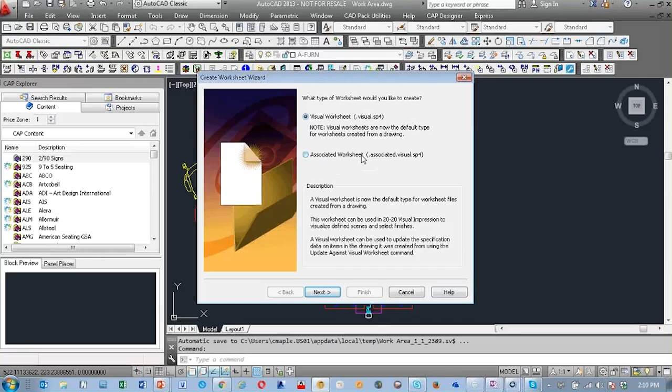There's two types of worksheets that you can create. There's a visual worksheet, which is basically your standard takeoff, and then there's an associated worksheet, which links the worksheet to your drawing. It doesn't really matter which one of those you use. Everything that I'm going to show you today will work either way. So I'm just going to go ahead and select the objects in my drawing and create a worksheet and have that worksheet come up for us.

Okay, so here's kind of the standard way. I've created my drawing. I now have created my worksheet, and you can see that all the items are in here, but they don't have finishes on them. There are multiple ways that you can apply finishes in Worksheet. For today's class, I'm going to just go into global options and globally select some options so that we can quickly get the finishes specified. So I'm going to pick a bright white bracket here.

I'm going to pick a standard textile. I know from my drawing there are ways that you can organize and group this. I know from working with this drawing what I'm actually specifying here. So this is a textile option on a chair, and I'm going to select the commuter cloth, and this is going to be slicker. I'm going to select a storm strap on my chair. The frame is going to be silver.

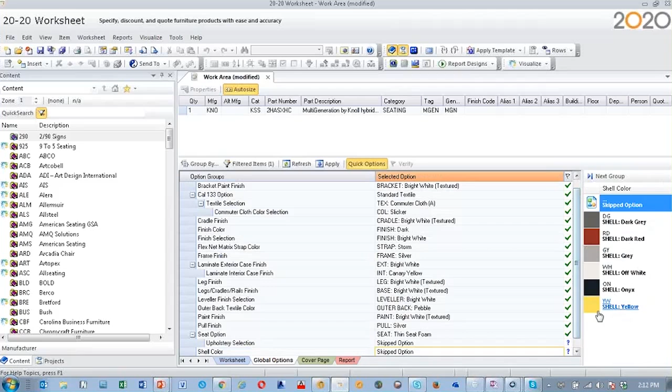The laminate exterior on my case is a bright white. The interior on my case is going to be yellow. Oh, by the way, this is Knoll product that I'm specifying here. I've got bright white legs. My outer back is going to be pebble. The paint finish is going to be, I believe this is a bright white as well. Pull finish is silver. My seat option, I'm going to go with a thin seat foam. Oops. With a dark gray shell.

Go back here, I skipped this option here. Standard textile, sorry. The seat textile here I want to pick is a bistro chamomile. And then my textile is going to be commuter cloth again, and again that slicker color, and then I'm going to pick my veneer, and I'm going to pick a maple veneer, and matching veneer edge.

Okay, so I've gone through and I've selected all of my finishes. So now if I click back on my worksheet, I can apply those finishes, and you can see that everything now has been selected. So just to review, I've gone from my drawing into my worksheet, applied all my options. Now I'm ready to do presentation drawings or rendering, so I load Visual Impression at that point. So I'm going to go into scenes. I don't have my drawing broken up into scenes, so I'm going to choose the entire drawing, and it's going to load Visual Impression.

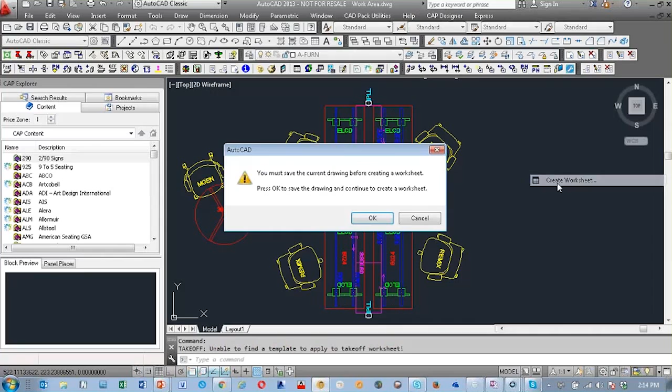So I'm going to repeat myself here a bit. I'm going to go back to CAP. I'm going to create a worksheet file. I'm going to overwrite the one we had before.

And I'm going to go ahead and let it create a file.

At this point, I don't have any options applied, but I can go into Visualize, go to Scenes, Entire Design, and have it load visual impression from there. What you'll see load is that same scene, but with no options applied, which is basically the way it is right now in Worksheet. So none of the options in this scene have been applied.

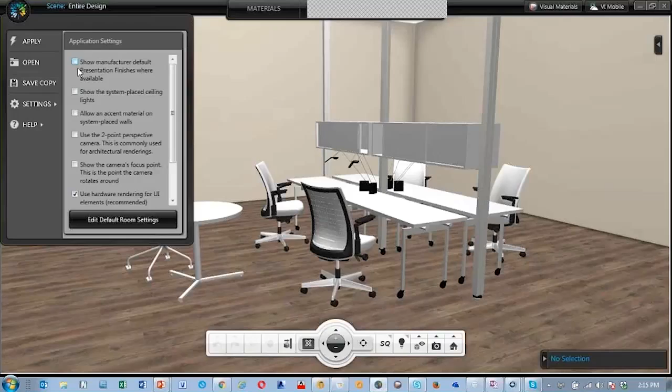Just as a note, some manufacturers, like Knoll for example, show default presentation finishes where they're available. This means the manufacturer selects finishes to show visually before they're selected. If I turn this on, you can see those finishes are very different. I downloaded this from Knoll's website and they've already got their presentation finishes in there. But for this, and for most manufacturers, the presentation finishes may or may not be there.

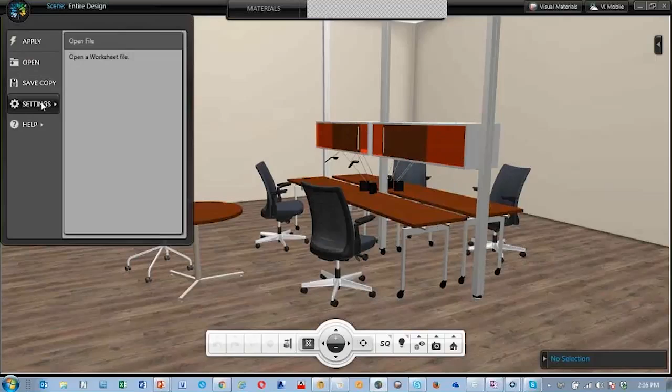So I'm going to turn that off for now.

Okay, so let's now look at using visual impression as a visual specifier. I'm going to go ahead and select this chair, select materials, and just like it's presented to me in Worksheet in a text value, it's presented to me in visual impression, but it's more visual.

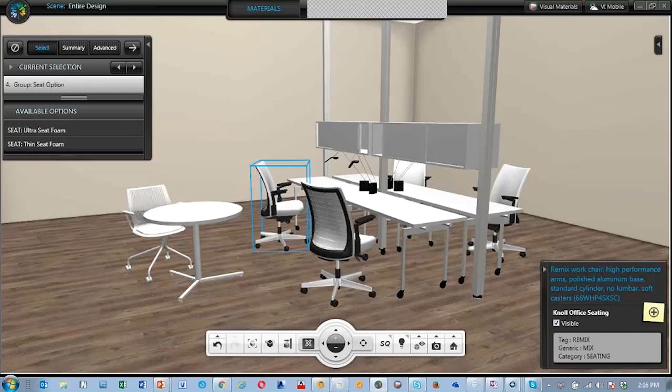So with the strap on the back of this chair, I want it to be storm. The outer back, I want to be pebble. And you can begin to see those options being applied to the chair as you select them.

I'm going to select a thin seat foam, standard textile. Then I can scroll through here and select the textile that I want to use, which is, oops, I passed it, I think, which is Bistro. I'm going to pick the chamomile.

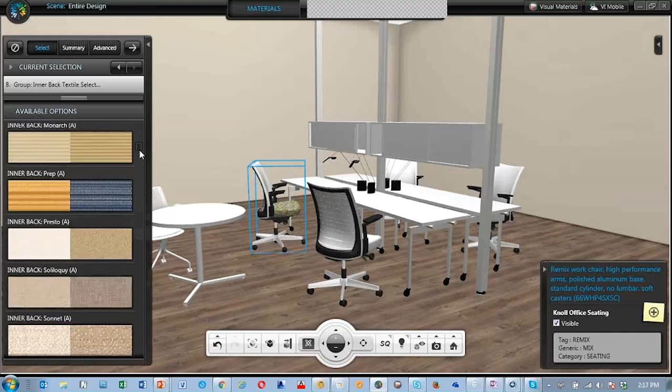Then for the back, I'm going to go through here and select commuter cloth again. These are the same selections that I made when we did it in Worksheet, so I'm going to select that again. The difference is, as I navigate the scene, I'm applying things as I select them.

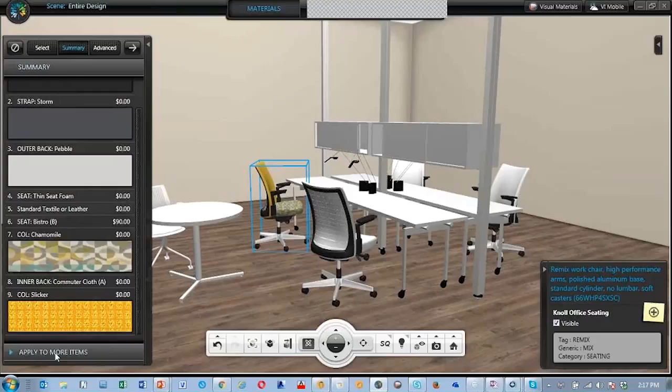So it's very easy for me to see how my selections are going to look on the appropriate item. The other thing I can do is there's a tag here that says apply to more items. In this case, I'm going to apply it to all occurrences of the item because I have 4 different chairs. So I'll select that and apply, and you can see now all 4 of my chairs have been applied.

Let's go on and do the same thing on the table here. I'm going to select bright white for that finish. The leveler is also bright white.

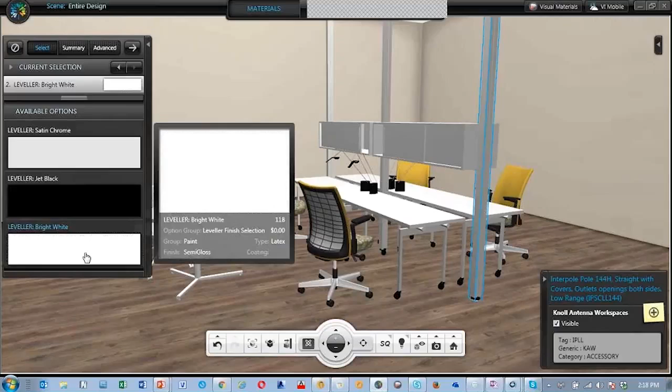Then I'm going to apply this one to all occurrences of that item, or because personally I don't know if this middle pole is the same part number as the others, I will select any items accepting all the options, because they're like items, those should apply.

One thing I want to note here is this does vary by manufacturer, just the way the different manufacturers set up their data. Some you can apply in a broad brush manner, others you have to be a little more selective, but we give you 3 different choices here to apply items.

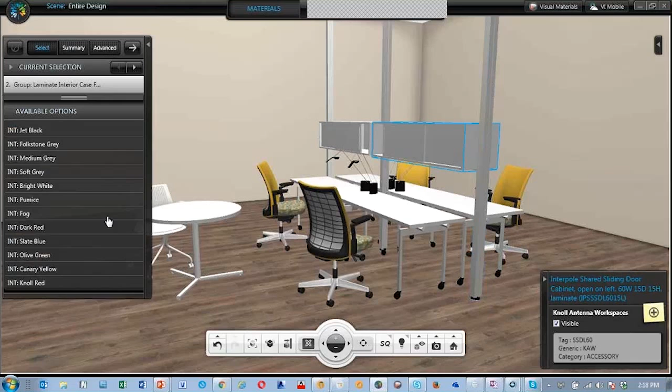So now I'm going to select the overhead bin. That's bright white, and then I want the background in there to be canary yellow. And then I'm going to, because I know, pick the brackets.

I'm going to pick a silver bracket. And because I know that these happen to be 2 different sizes, I'm going to say items accepting all the options above because they're not the exact same part number. So I'll apply that, and that will appear there.

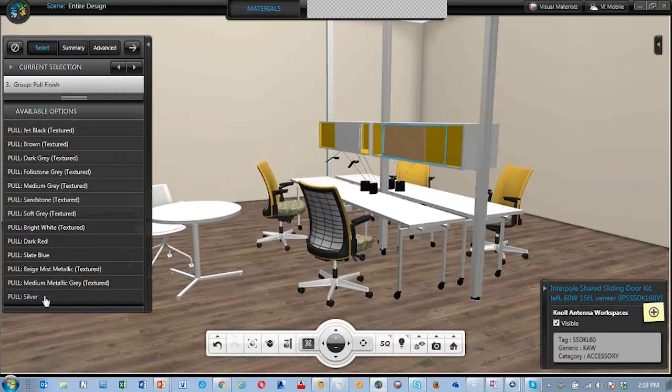Select the door. I'm going to again pick that maple finish for the door, and I'm going to pick a silver pull, and apply that to all the finishes too. As you can see, that gets applied all the way around.

Go to the tabletop, select the veneer. Again, I'm going to select maple, and apply that to all the finishes. If you notice here, it applied to the like desktops. This table has a slightly different option group, so it doesn't apply to the table.

But I'm going to go over here and go ahead and select the same finish for that table. So again, I'm going to pick maple. And here I'm going to pick a bright white base.

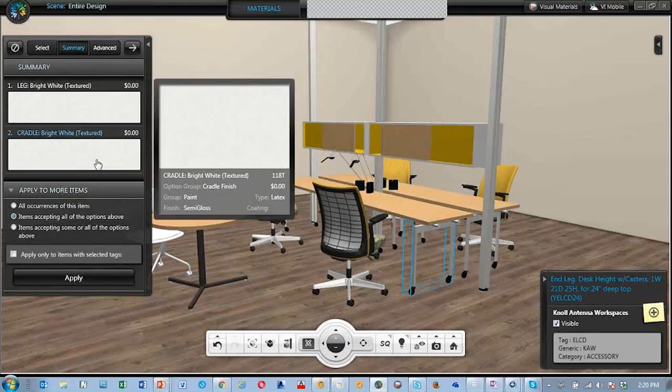And then I'm going to select the chairs and finish selecting those. Let's see, we got another bright white. Again, I'm going to apply to as many items as I can. And then I have one last chair here where I'm going to make this a silver frame chair. The shell I want to be dark gray, and I want to put that same commuter cloth on the chair in the slicker fabric.

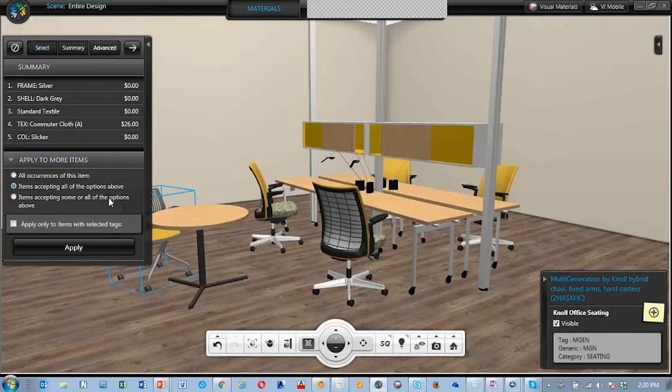Okay, so very quickly you can see that I was able to do all the same optioning that I did through global options, but I did these in visual impression. What I can do at this point is apply these back. So when I select here, whatever application I've launched the visual impression from, when I hit apply, it saves back to that application. In this case, I launched from worksheet, so when I hit apply, it will save all those finishes back to worksheet.

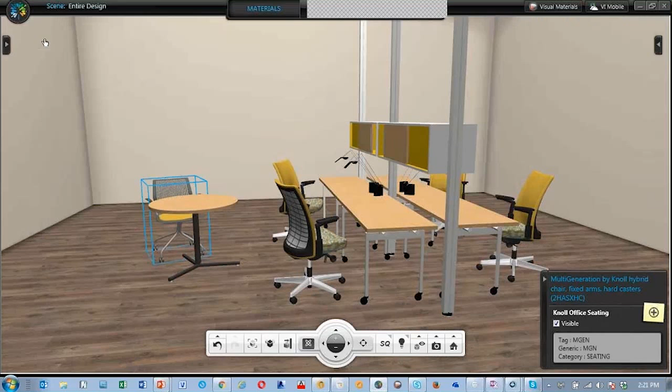So at this point, just so I can illustrate that to you, I'm going to go ahead and close out of here. And as you can see, all of those finishes are now in worksheet and fully applied.

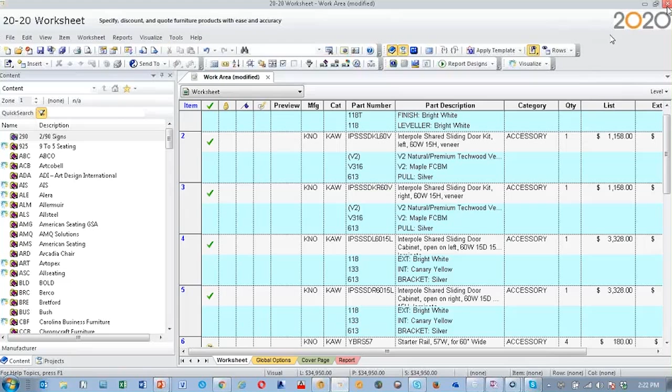So let me go ahead and close this again. I'm not going to save it. And I'm going to go back to my PowerPoint here. The next thing I want to talk about is scenarios. So I know when I worked as a designer years ago, it wasn't enough to give a customer one option. You often had to give them different options, maybe color schemes or product types or things like that.

Well, in the case of color schemes, visual impression can really help you out because we can set you up to create different scenarios and also be able to quickly apply those scenarios. So I'm going to go back now to my drawing, and we're going to go through that same process, with a slight difference.

In this case, what I'm going to do is take worksheet out of the equation. I'm maybe early in my process, and I just want to play with some ideas. So I'm going to launch visual impression directly out of CAP, and visualize scenes. It's going to do pretty much the same thing as it did when I launched it out of worksheet. It's going to bring all those items over into VI, and they're not going to have finishes on them.

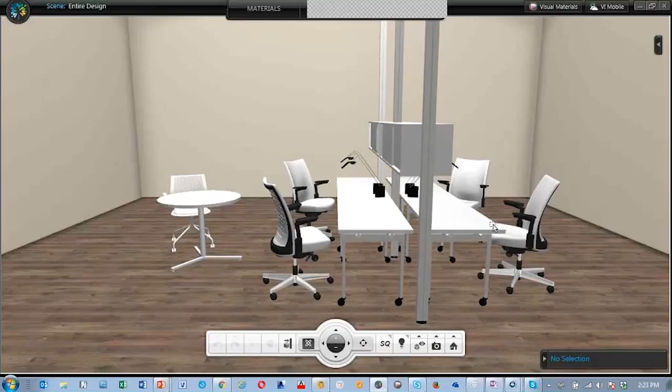So here's another way that you can do things. A lot of times I just want to play with some ideas, so I might put something in a drawing, launch it into VI, and then be able to play with some finishes. So I'm quickly going to go through that same process we just did to visually specify items.

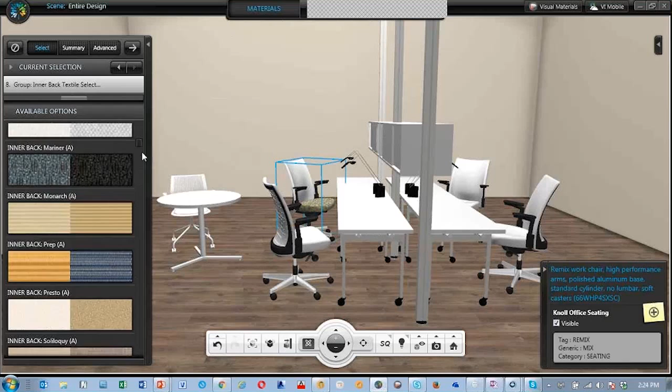I'm going to pick the same finishes in the interest of time. So I'm going to pick the storm strap, pebble back, thin seat foam, standard textile. Scroll down here to my bistro fabric, select chamomile, see that apply. Now it's asking me for the inner back textile. I'm going to go up here to commuter cloth, select that, and I'm going to select the slicker color again.

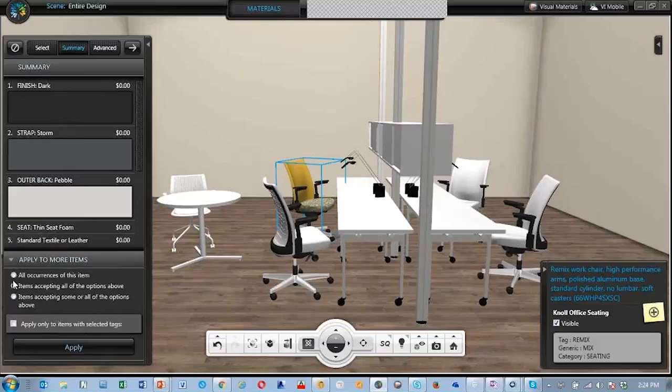This is really handy because then you can see all of the finishes as you're selecting them. So again, I'm going to apply this to more items. I want it to apply to all the same chairs, so I'll put that in. I'm going to select the maple tops.

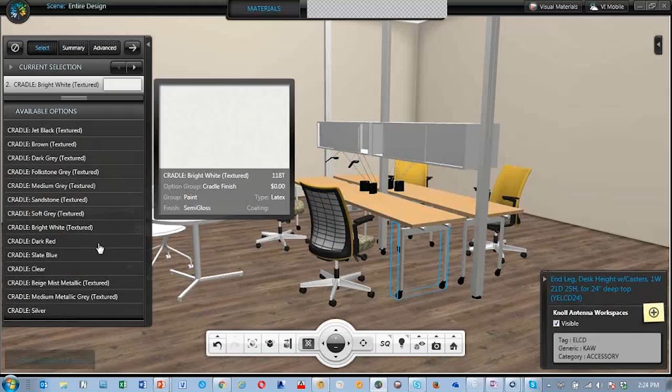For all the desks, I'm going to make a different selection here so that it applies to everything. Let's do the bright white table and bright white textured legs. I'm going to apply that to as many things as I can. Come up here to the cabinet, again we've got bright white.

The inside of the cabinet to be canary yellow. I want a silver bracket, and I'm going to apply that to as many things as I can. Select the door.

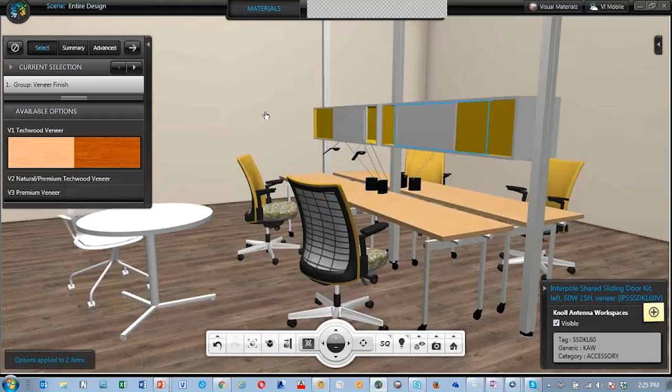I'm going to pick a maple door again, and a silver pull, and apply that.

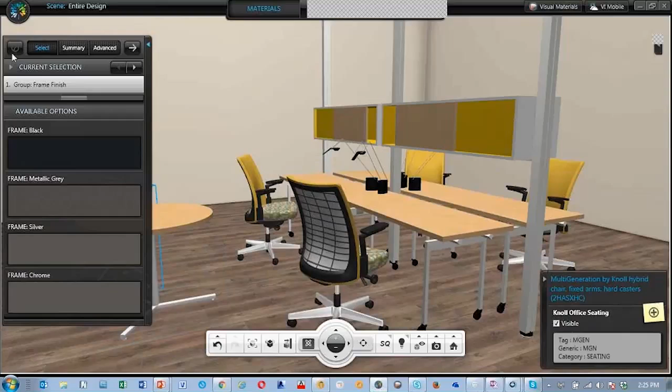Select the table. Select the maple table here with a bright white bottom. And then I'm going to do this last chair with a silver frame, a dark gray,

and let me find my commuter cloth again, and the yellow slicker color for the seat. I think I don't remember if I did these posts, so I'm going to look at that again, and it looks like those are done, so I'll make sure that we have those.

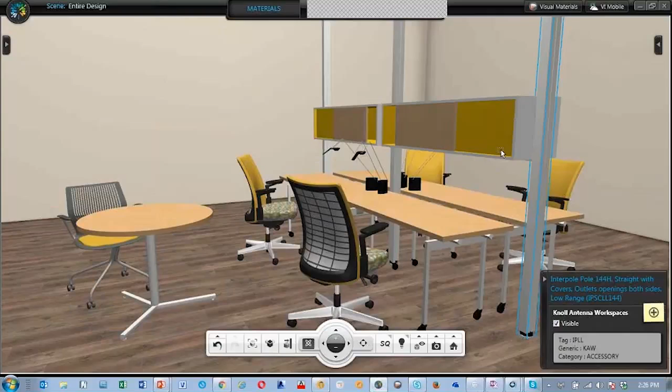Okay, so we've really quickly optioned out all of our items using visual impression. So at this point, you know, I kind of like this, but, you know, I like yellow. I'm not sure my customer's going to like yellow. So what I'm going to do is, well, there's a couple of things I can do.

One is if I'm sure that this is what I want in my drawing, I can apply it back to my drawing. In this particular case, I'm thinking to myself, you know, I like this, but I'm not really sure, given the application, that the customer may like this. So what I want to be able to do is just save a copy of it.

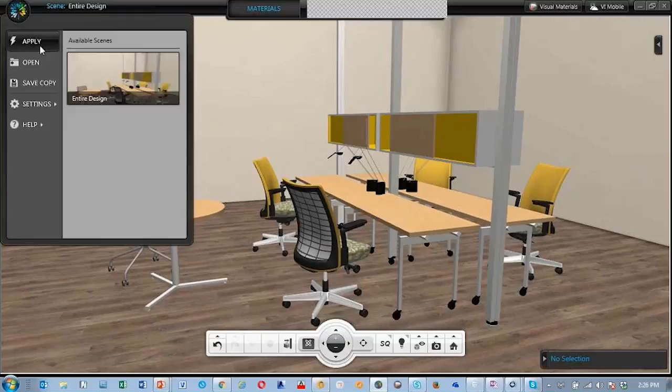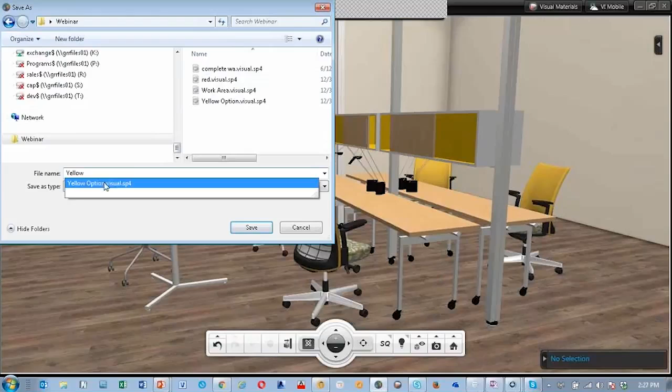And what Save a Copy does is it creates another worksheet with these finishes applied. So I'm going to save that copy, and just for kicks, I'm going to call it, so we can recognize it, yellow. Okay, and it saved a copy.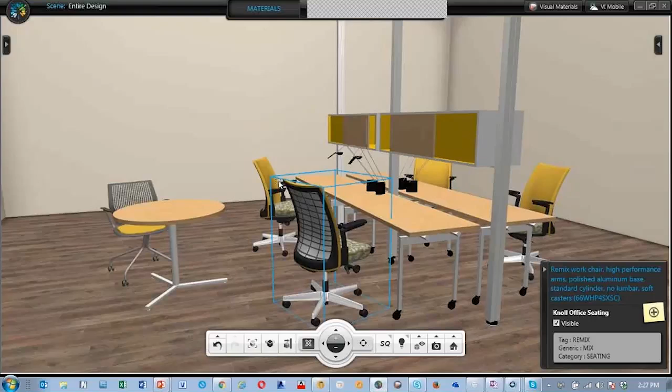Now I'm thinking, you know, maybe this is a little more traditional. I'm going to change some of these colors around and create a different application. So I can go back here and quickly select the chair, and if I go to summary, it will tell me all the finishes here that I have selected for my chair.

So let's say, okay, this is all yellow. Maybe I'm going to do a red color scheme. So I can go back here and select chamomile, and it takes me right back to where I was specifying, and it lets me pick another bistro fabric.

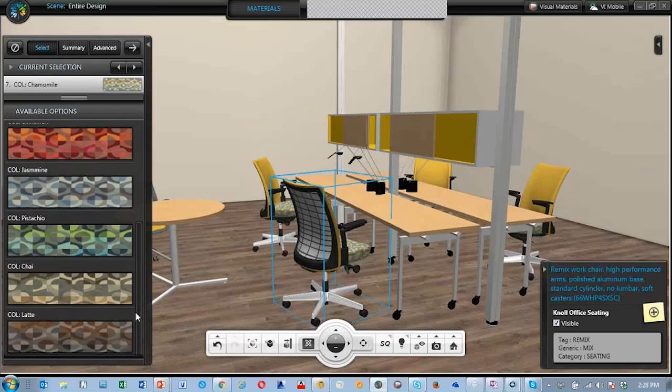So in this case, I'm going to pick red. And for the seat back, I still like that commuter cloth, so I'm going to pick that. First I have to find it. There we go, commuter cloth.

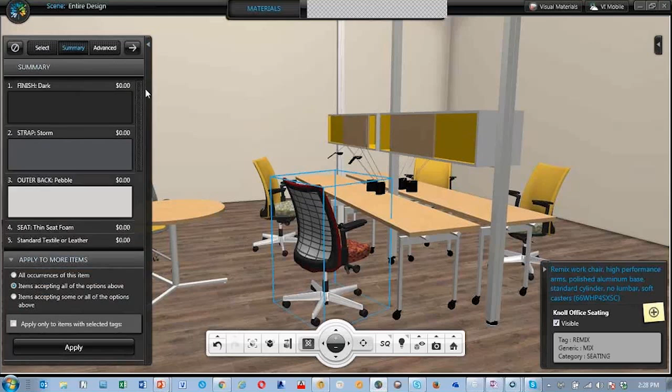And there's a balloon red in here, and the rest of the finishes I'm okay with, so I'm going to go ahead and apply that.

So now the yellow overheads don't look so well, so I'm going to come in here and do the same process. I'll select the canary yellow.

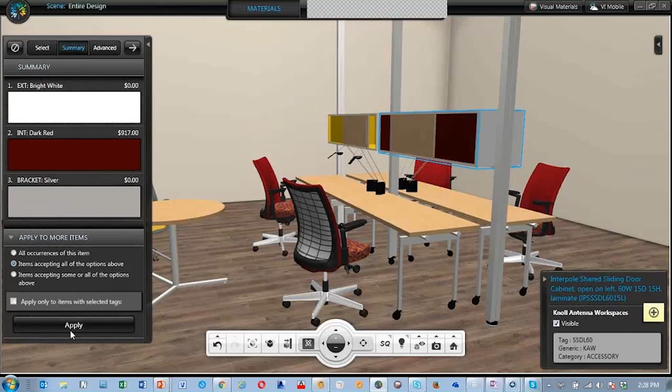That takes me back to the colorways that I'm allowed for that particular item, and I'm going to select the dark red there. Everything else is fine, so I'm going to go ahead and apply that so it applies all the way around the scene.

And I'm thinking maybe I want a darker type of worktop. So I'm going to go in here. Again, it will select the same price and colorway, and then I can apply that. Same thing I need to add to the doors.

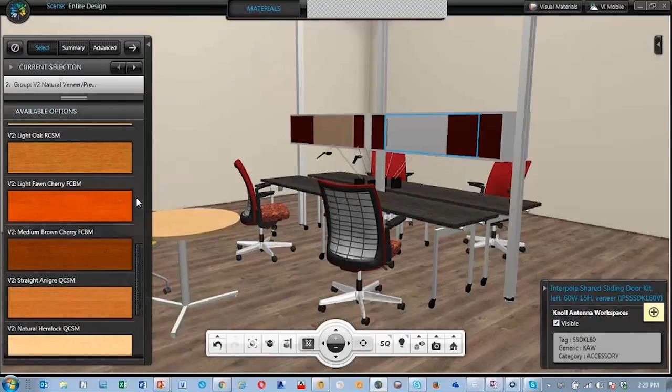Let's see, what did I do here? I selected a different finish. Let me go back here. I need this one. Select that. And silver pull still, and apply. So I've got both sides now in that colorway.

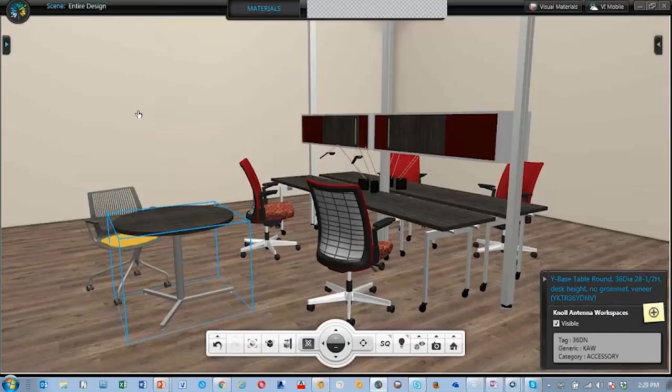I want to select the table and change it. And again, I'm just going back and reselecting those options. The chair's fine. I'm going to change the yellow seat to the red balloon color seat and apply that.

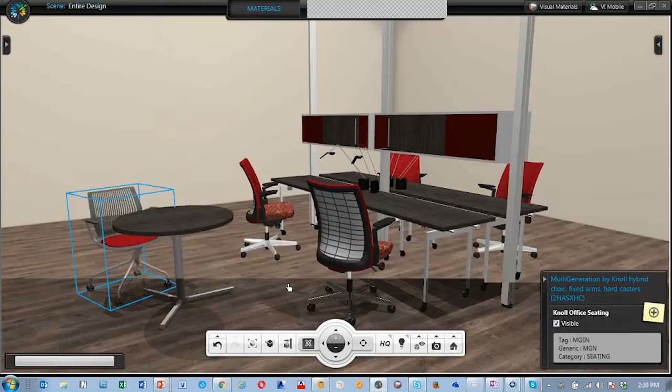And now if I go into an HQ view of this, you can see that I've created a completely different scene and a different colorway for my customer, a different option. Okay, I'll brighten it up so you can see it a little better.

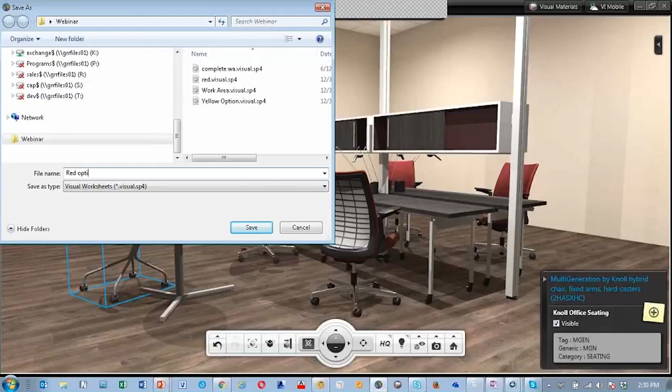Okay, so in this case, I think maybe my customer might prefer this better than the yellow. So I'm going to do two things here. I'm going to save a copy of this, just like we did the yellow option. I'm going to save this as a red option, which saves it, and basically creates a duplicate worksheet in red.

But I'm also going to apply it, and that's going to apply it. Remember, apply goes back to your host application. So in this case, I launched out of the drawing, and it's actually going to apply the finishes back in the drawing. Now, with all of these, you don't have to do these. I'm trying to illustrate different options that you have.

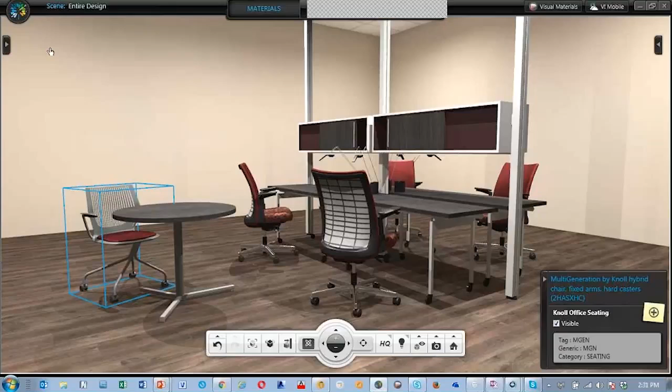So let's go back and look and see what this does for us in our drawing. If I go back to my drawing and do a cap info on one of the chairs, you can see the colors: it's Bistro Cinnamon and the Commuter Cloth Balloon. So this has the red finishes applied. If I were to run a bill of materials at this point, all my options would come over automatically.

One of the nice things about using this kind of scenario type planning and creating multiple worksheets is we also have a way that I can take those finishes and reapply them back to my drawing really quickly. So if you go under Visual Impression, we have this 'update against a visual worksheet.' Basically, the drawing will recognize any worksheet that has been created from itself or replicated from itself.

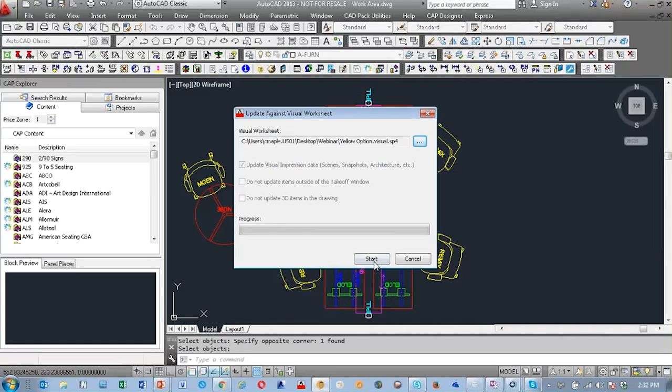So basically, we create a bill of materials when we go into Visual Impression, and then I've created two copies of that visual material. Let's say we go out to our client and they say, well, that red's nice, but it's not exactly what we want, and you as a designer say, well, you know what, I really like this yellow color. I can really quickly update against worksheet. I can select my yellow option worksheet, open that, and by running it, that now applies all the yellow into my drawing.

So if you look here, now it's Bistro Chamomile and Commuter Cloth Slicker. If I were now to launch Visual Impression out of here, you'll see that all of my options are already there, and the scene that we're going to see will be finished in yellow.

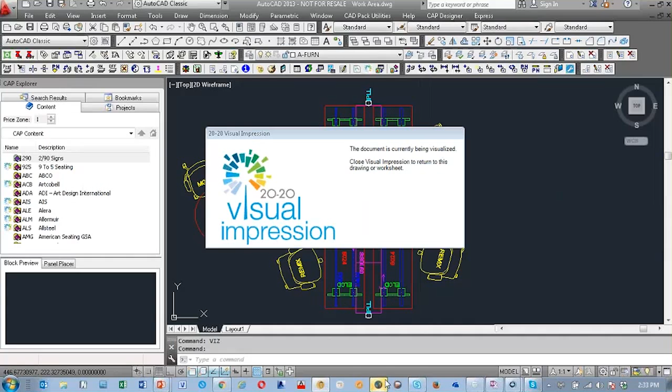Okay, so this is really handy to do, and you can save a lot of work by setting some of these up before you talk to your customer or before you hand this over to your designer.

I'm going to pause just a minute. To the panelists, are there any questions that I can address at this point?

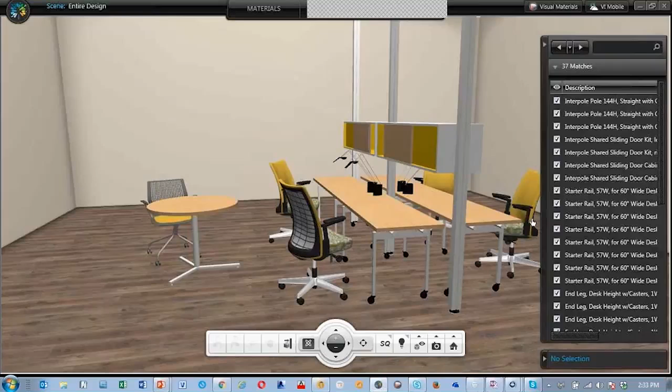Okay. Sorry, we are firing away, trying to keep up with all the questions. There was a question, I think you can answer this pretty quickly, about where you found the ceiling. I think you've got a grid ceiling or a tile ceiling.

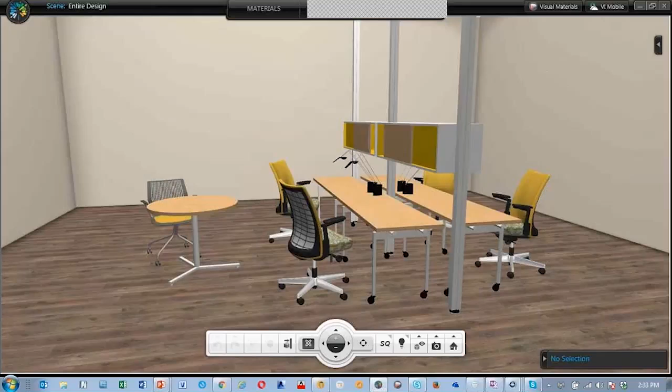Oh, in the ceiling, yeah, in the ceiling, if you go into materials, we have textures now in the materials, and we have different tile-based textures. There's a 2x2 grid, a suspended 2x2, and a suspended 2x4. There's also a tiled 16x16.

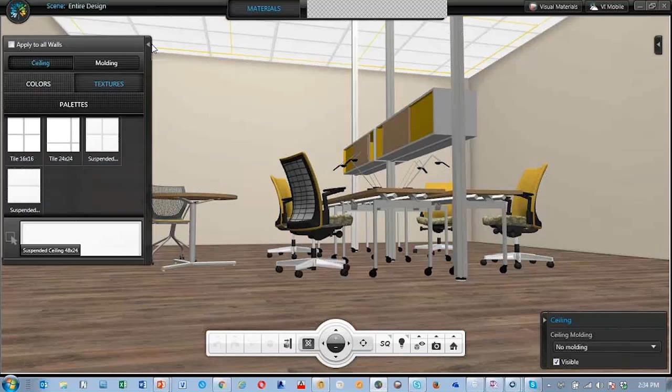Has anybody used Visual Impression in this way before? I'll ask a question—we'll follow up on that later. But I'd be interested to know if you have; it'd be interesting to type that into the panelists.

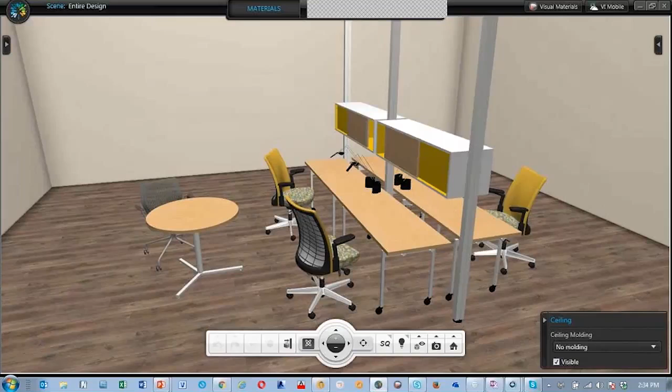Okay, so I'm going to go back to talk about just a couple of other things here in our PowerPoint. One of the other things that you can do is in a dealer where the designers are doing the designing and they're handing it off to a project manager or maybe a salesperson to actually do the finishes and options and finish out the project, you can take that.

You can take a visual—sorry, let me say this differently. You can outfit your salesperson or project person with VI as well, and that gives them the ability to visually specify, just like I've done for you today.

So let's say I'm working on a project. As a designer, I do the space planning and the drawing. I hand it off to someone else. I give them the visual.sp4 file from the drawing. If they have worksheet and VI, then they can visualize that project just as well. That can be a little confusing, but the key is everything revolves around the worksheet that comes out of the drawing.

So that's a way that you can, you know, when you see VI, and I've heard people say with VI they don't have time to incorporate it into their process. Maybe there's other ways or other people that can help you with that. And I personally don't refer to Visual Impression as a rendering tool. I refer to it as a visualization tool, and it's because of these other capabilities that I do that.